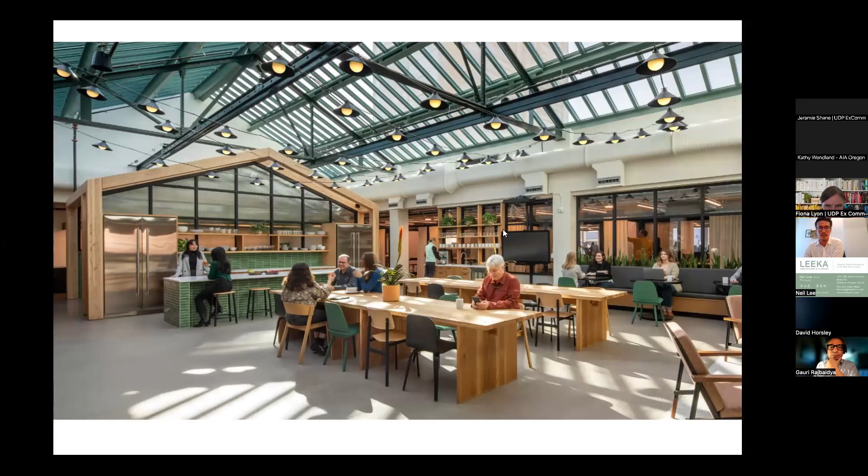Before I dive in, just a little bit about us, SERA Architects. This is a view of our beautiful atrium right here in the Galleria in downtown. We're about 100 design professionals, an interdisciplinary firm of architects, interior designers, urban planners, and designers, and we have sustainability resources in-house as well. We do have a Bay Area presence in Oakland. We're 100% employee owned.

So here is a view of the center of the Jade District. If you're not familiar with Portland, the Jade District is out in Southeast Portland, and this is what I call the center, 82nd and Division, a very important corner here. The reason I bring this up is Canton Grill, what we're going to present today, really only exists in the fabric of the work that APANO has been doing over the last 10 years.

With APANO being a place-based community organization, it was really important for them when they set their roots here to understand the kind of community they were doing this work for.

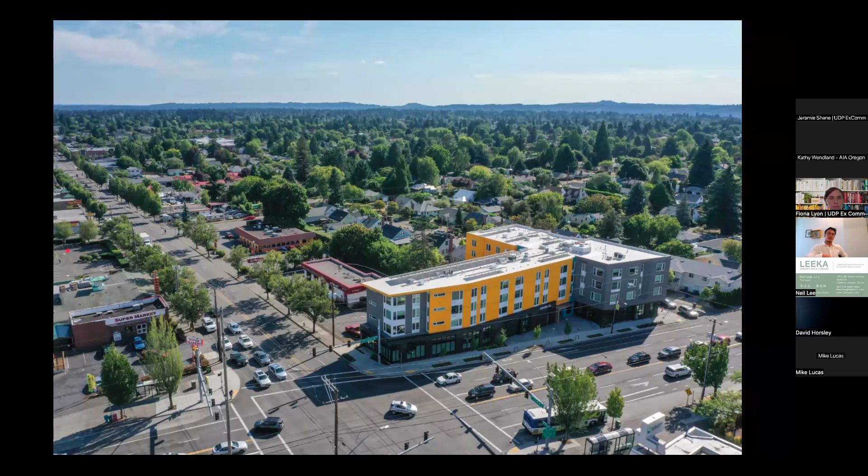In this district, APANO really felt like each parcel was precious, and faced with gentrification and their values in anti-displacement, they were left with two options. How do you deal with gentrification? Do you let it pass through, or do you try to keep the social capital here in this neighborhood? The Canton Grill is an example of APANO fighting to keep the social capital here and build into this district.

As we dove into this project, exploring the artifacts and materials left over, there's quite a bit of history and patina and the story that we wanted to capture. There's just this ambience and experience of the restaurant that I don't think would be easy to recreate.

So we're going to try to see if we can keep some of this for the future project. But I only got to go to this restaurant once, and the more I worked on this, the more I regretted not being able to go more.

Sorry, I skipped over this. The restaurant was established in 1944, and it stayed in the family all the way till 2022. It was a beloved icon and landmark for Southeast Portland.

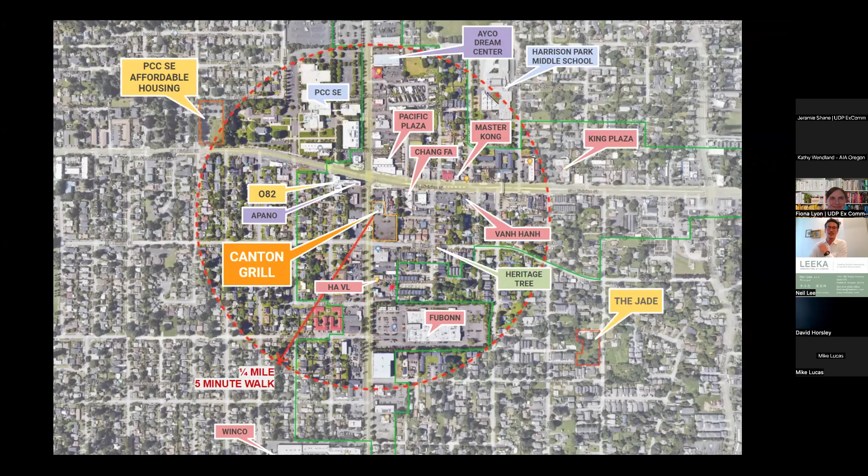Some early site analysis that we did for the project. The site is perched up on a little bit of a hill before it slopes down as you move south, so it's going to get great sun exposure.

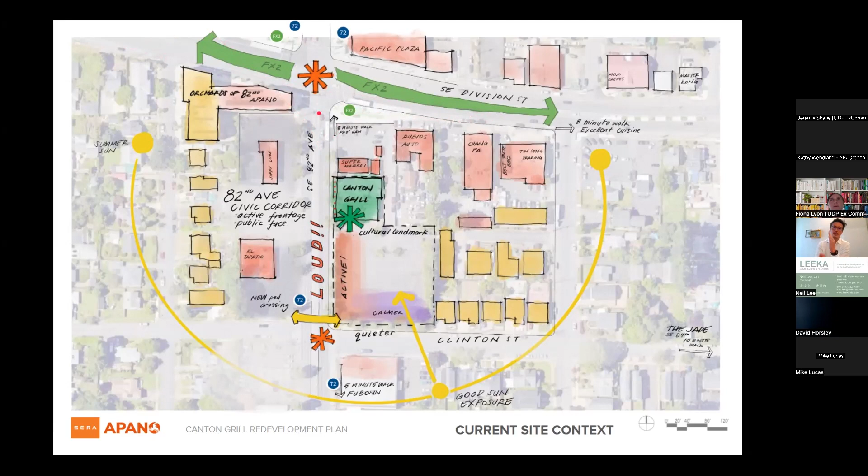As we talked about the project, the fact that 82nd is just so loud - we couldn't avoid that in any of our conversations. That always dominated. So 82nd is just such a loud place, and that was always going to be a challenge for us to design for, especially with APANO wanting this project to be a walkable, vibrant mixed-use project. That was something that always came up. And with Division, we have the FX2 line, and the 72 line going north-south is the busiest bus route in the city.

So not only did we look at the current site context, but we anticipated the future context. We all knew how big of an impact the Division improvements and the new FX2 line had on Division with the medians and all of those things. So we put this out there to not discount the fact that with the new 82nd improvements and the new FX line coming, that could really change the character of 82nd, which is a civic corridor.

And on either side of 82nd, our site included, is zoned CM2, so quite a bit of density could be introduced over the course of the future. Just to the east of our frontage, it transitions to residential pretty quickly.

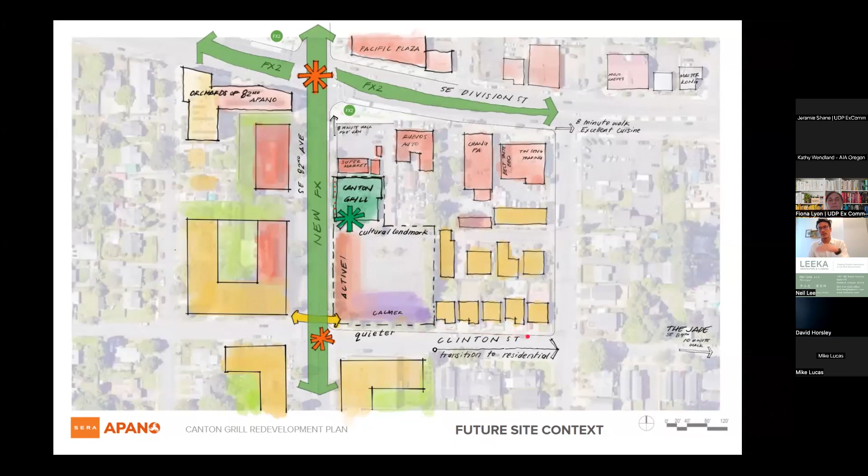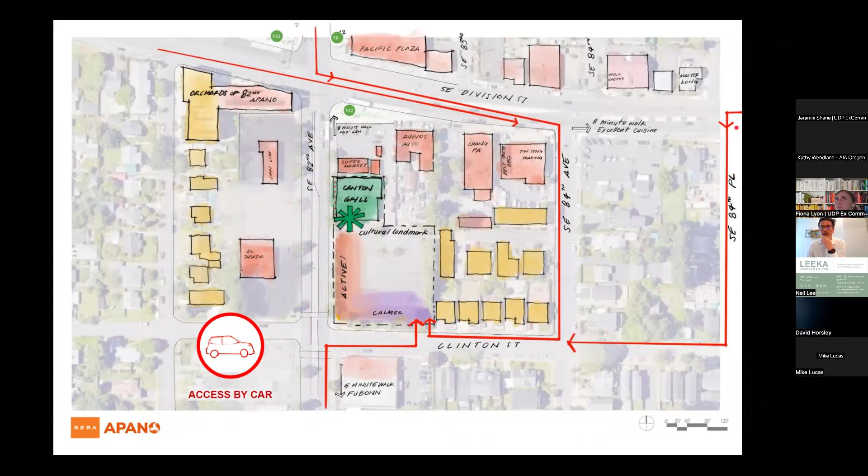I think ironically, it'll be a little bit easier to get to the site by bus and by walking. Biking is a little trickier with not all the streets being connected out in this part of town. Some of the roads are unimproved, so I'm looking forward to the new crossings and intersection improvements that'll help improve bike access.

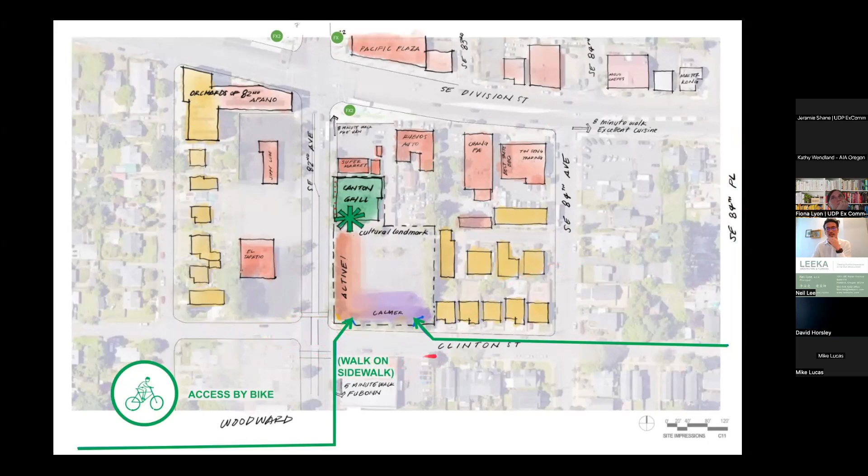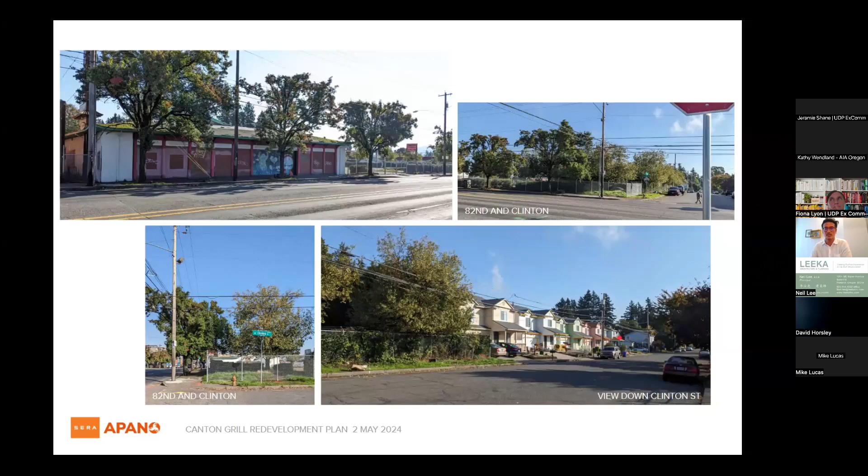Diving into our process, we started with a big goal-setting workshop. APANO very much values consensus building with their constituents and stakeholders, so we brought in what they call their friends and family of APANO - not only the project team, but members of their board, some staff members, and the Jade District steering committee.

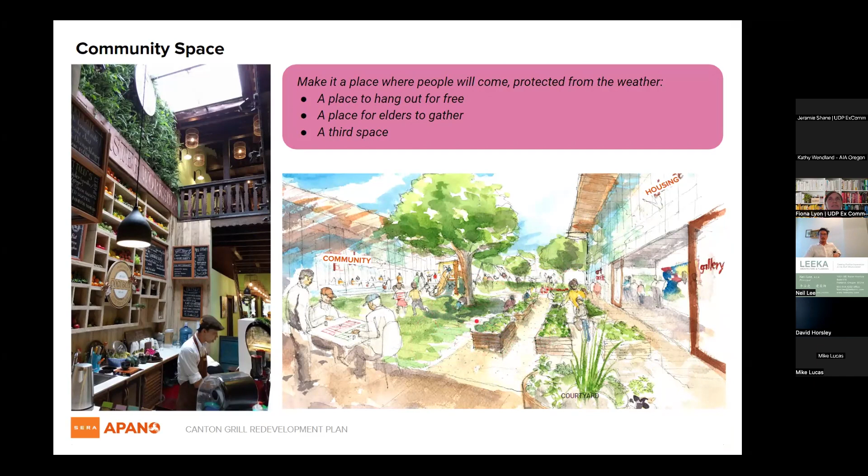Some ideas for the community space: make it a place where people could hang out for free, elders could gather, make it a third space, definitely protect it from the weather. This image in the bottom right actually came from the Jade District visioning plan from 10 years ago - so that project still has mileage out here.

Some other ideas for open space - is there a way to make the plazas have cultural markers so that it looks like not just anywhere in town, but specifically for the Jade District? Some interesting opportunities to bring landscape to the site.

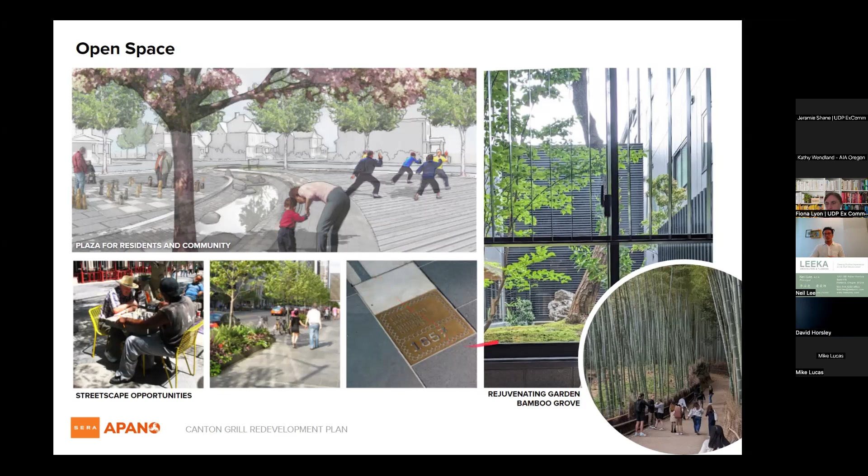And this isn't something you always think about with the Jade District, but we're going to have great opportunity to get views out to the mountains, the hills nearby, just the way that it's perched up above the surrounding area.

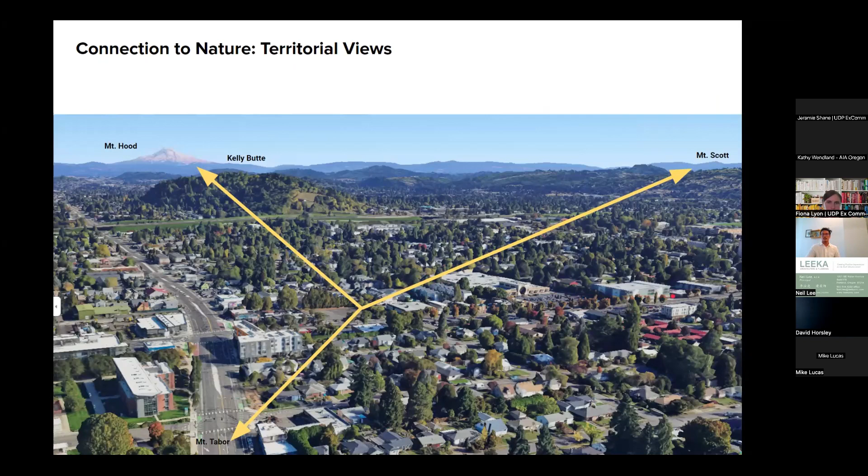As we looked into the commercial programs, there was quite a bit of excitement to bring food hawkers to the site. In Portland we're famous for food carts, but this would bring a different nuance and feel, the food hawker scene, like if you've ever been to Southeast Asia, Singapore specifically, or Malaysia. It's a very energetic and dynamic thing where someone vends maybe one specialty, but they just have this one area to do it. It's a really nice feel, and that would be really cool if we could bring it to the Jade District.

These ideas of micro kitchens and retail accelerators came from APANO, not just thinking for themselves, but how do they support the surrounding community. If somebody wants to start a business and needs a leg up, could this development have a place to help support them in that way?

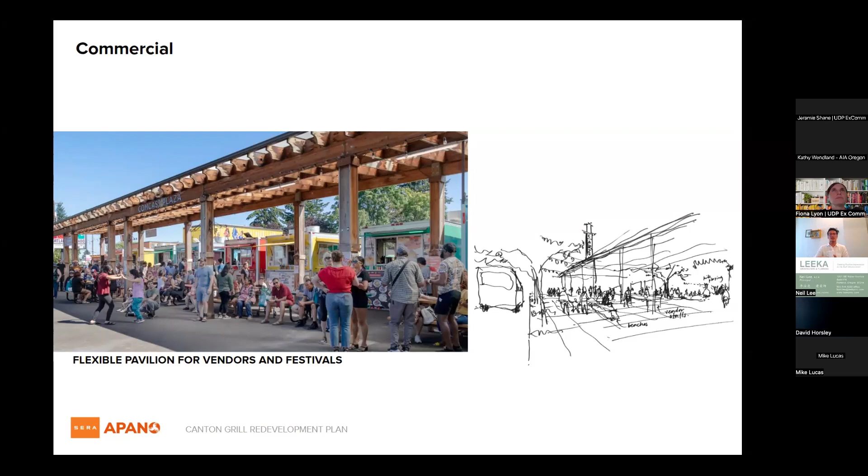So this is the Portland Mercado, which is pretty successful.

Once we got through that process, we finally put some schemes together that combined all the different programs. This one we called the centerpiece, trying to invite public and community space into an atrium or skylight-lit space. Hawkers and more entrepreneurial spaces could filter along the street edges of Clinton here, and then 82nd running up in this kind of purpley magenta color.

This recognizes the importance of the location of the Canton Grill restaurant and how it served as a landmark. In this case we're not keeping the restaurant, we're not redoing it, but adding in new columns and evoking the facade of it, bringing a place where people can learn about the history of the Canton Grill and things like that.

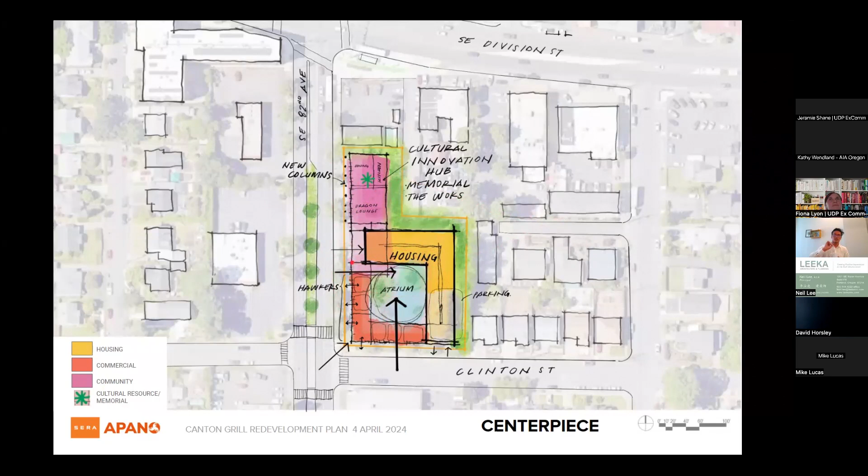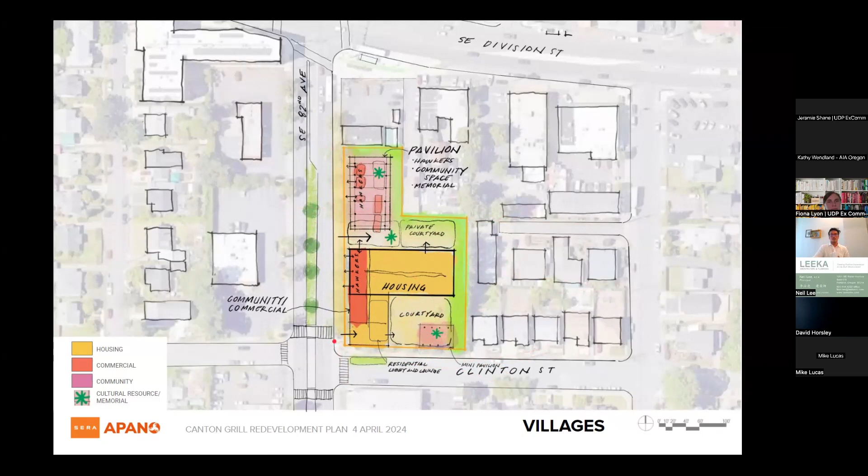In this scheme, this is where we introduced the open air pavilion that's flexible for the food hawkers and vendors, and maybe could have community space, creating a little bit of separation at the mid block. This is actually about 200 feet. The housing would be on the southern portion, with a courtyard with great morning sun access. So this was the two options we had midway through the project.

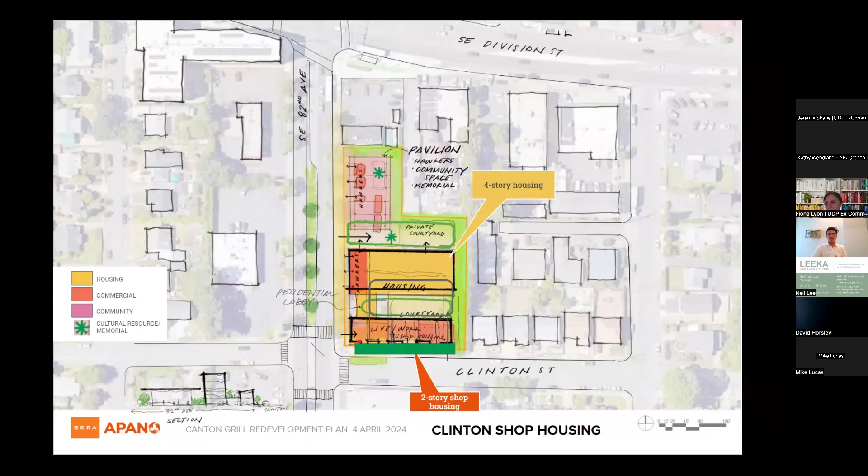We also saw an opportunity to tweak that last option. Maybe we could add a 2 or 3 story shop-housing instead of the courtyard, so it has a bit more of an edge on Clinton Street. This frontage could possibly be a bit more compatible with the single family residential adjacent to it, maybe creating that transition from commercial to residential.

I'm going to compress our design process down into this one slide. We took those three schemes and engaged back with the friends and family of APANO, got some really good feedback. There was a lot of excitement for the public open space, and some good feedback about maybe programming too much onto the site. From that, we took those three schemes and consolidated them down to two options: one is an L-shaped building with a pavilion, and the other we mixed and mashed together, kind of like a combination meal from the old menu.

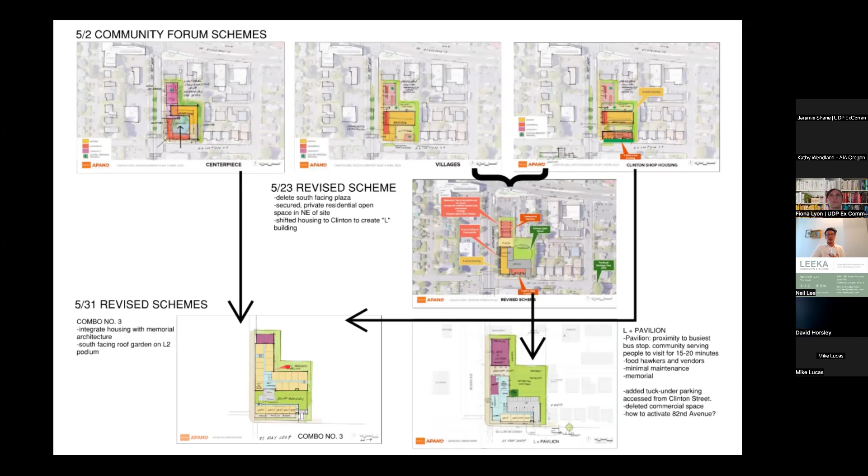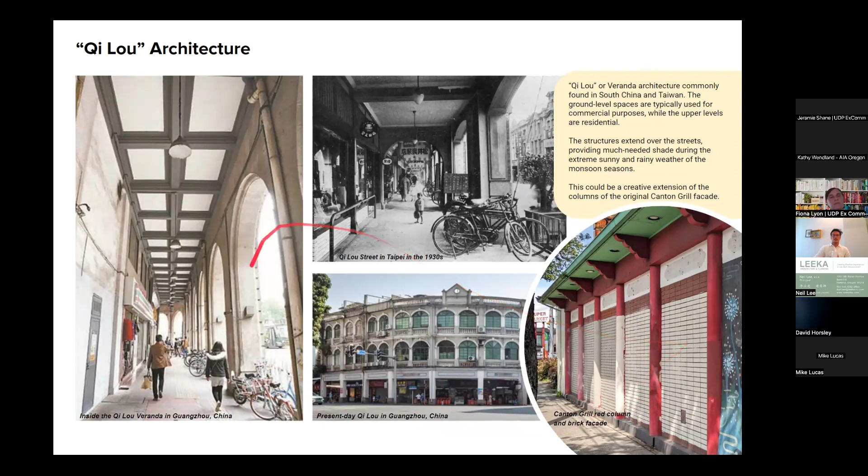We had a little more time to dive back into the vernacular architecture from Guangzhou. Here's an example of some Qi Lou architecture, veranda architecture in Guangzhou and Hong Kong. You also see some of this in Taiwan. This type of colonnade, with the walkway protected by the building, is protective against monsoons and the hot sun in that tropical climate. So we felt there might be a formal connection with the facade architecture of the Canton Grill, which we could study further as we get into the architectural design. Out here in the Northwest, with how rainy it is, this might actually be a welcome thing.

Oh, some people can't see. We're doing okay? Travis, I think you're good. Yep, Neil, maybe try closing out and rejoining. But I think the rest of us are good. Thank you for bearing with me all the way till here.

We're getting to the two schemes that we currently have. This one we called the L plus pavilion, but eventually just called it combo number one. In this scheme, we have an L-shaped affordable housing footprint on the corner of 82nd and Clinton. Some important elements: we really want a wide sidewalk on 82nd for opportunities for nice street trees.

Maybe there could be another place for benches and more landscaping, just to soften up that frontage and create a bit more buffer. We sketched in the new crossings that are going to come in. I think there's going to be a signal to stop traffic on 82nd, which will be pretty exciting and completely change the dynamic of this intersection.

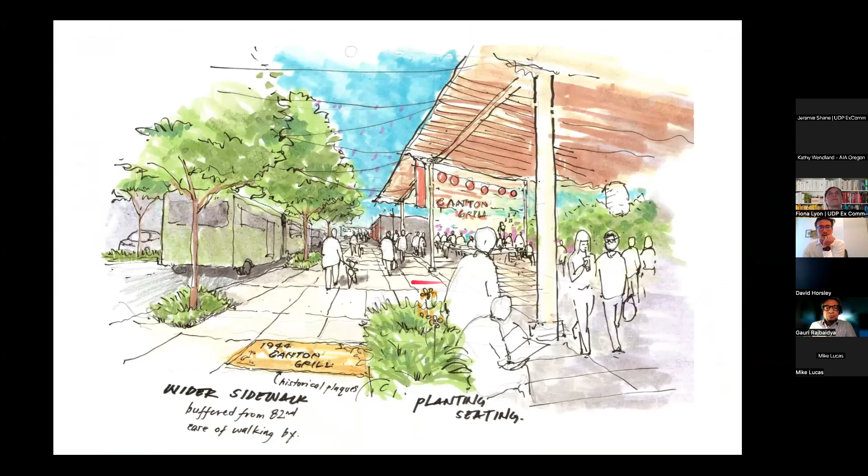Here's a little vignette of what a widened and improved 82nd frontage could be, with a new FX bus. Some of the historical interpretive aspects, maybe we could make those into bronze plaques and get those into the hardscape — we're open to all kinds of things. If you can't tell, we're still pretty early in the design phase, so a lot of stuff is still on the table.

Here in Old Town Chinatown, there are some really great bronze plaques designed by Swen Ho that are out in the sidewalk, and I think those do a really good job.

Here's an image of what the Tai Chi Plaza could be, with some tables for the elders to play chess and Chinese chess. I think community gardens have been really successful in this neighborhood. Talking with residents of Orchards 82nd, they definitely want a big children's playground and a safe place for their kids to kick a soccer ball, not bouncing balls off of cars and things like that.

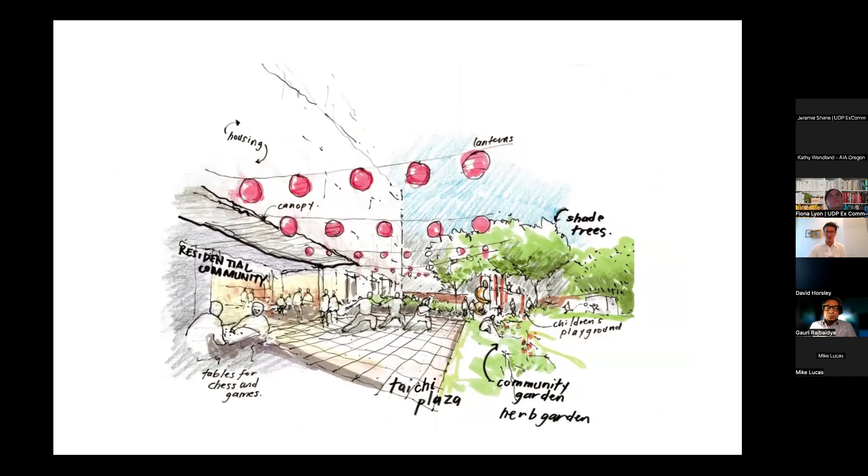The last scheme I'll share we call combo number 3, and it's a much more intensive development. Instead of a pavilion, we show this as a shell space that could be affordable commercial space. Maybe a portion of it is the memorial, so you almost visit it like a museum. There's a mid-block plaza you would enter through a big formal gate that ties all those uses together. Here, instead of the Hawker Alley, the hawkers are tucked under the building, activating 82nd.

What's interesting with this scheme is the L is pushed to the north, and we can create a little roof garden above the parking. This will be illustrated in this view. The higher density housing is pushed back a little bit, and then maybe you could do something lower scale that's more compatible with the residential adjacent to it.

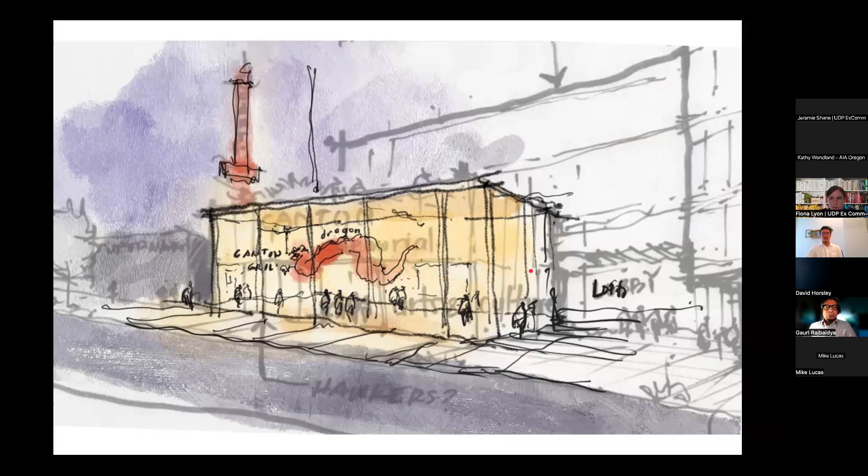Here's an idea where the pavilion, the affordable commercial space, or even the memorial could act like a lantern and be activated at night with different art exhibits and maybe even projecting art. So this was a dragon, which I thought was cool. And I think that's all.

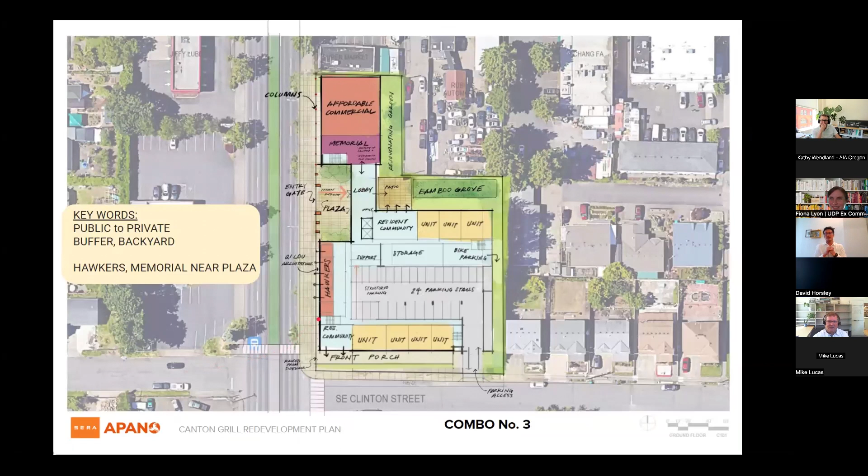There's a bit of an inside joke because this scheme was like a mishmash of a bunch of different things. I introduced it to the team as combo number 3 to get a couple chuckles, and then we decided to call the L Pavilion combo number 1, with the subtitle Simple Tasty Dish. This one is nice and simple, the most straightforward one.

Combo number 3 got its name because when Swen Ho was doing the historic research, she interviewed Fred Lewis and his daughter Cindy, and they talked about what made Canton Grill such a beloved place — it was just the consistency. Somebody could go to that restaurant for years and say, don't you ever change combo number 3, that's my favorite dish, that's the only thing I'm gonna order, but don't you ever change that. So that's where that came from.

Very creative, I love that.

We have a question from Saumya: you've talked a lot about the master plan program, but could you hone in on the development itself and talk about the targets for parking, types of units, quantity of units, just the development program in general? Yeah, that's a really good question. I think it's still fluctuating.

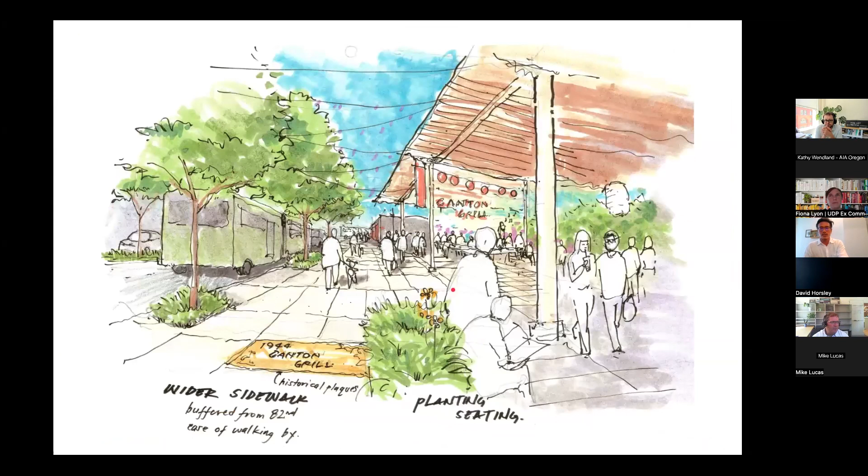So for parking, they could go with anything from 0 to hopefully not more than a 0.25 parking ratio. In terms of unit count, that's also fluctuated. This site could yield 200 units, but there's no financing that would support 200 units right now, so in this L scheme it could be anywhere from 40 to 60 units. That's tuck under parking, like 12 to 18 stalls, or even 20 stalls, which is in that 0.25 to 0.3 ratio range.

That's been the challenge — people do need parking in this part of town, ironically, even with the busy transit for getting to their jobs. But as you can see, the site isn't that big. If we provide more parking, we lose some of the great open space amenities on the site.

Thank you, Travis. While we're on this thread, you talked a little bit about zoning and the market — we hit the market before the zoning — but are there any other zoning challenges you've come across while researching this site that have been specifically challenging to design?

Let me think about that a little bit. So we're CM2 with a Main Street overlay, no design overlay. The CM2 is pretty straightforward. Since we're not trying to max out the site, we're keeping it at 45 feet tall and within the FAR, and since we're planning affordable housing, I think we have access to the FAR bonuses. All of that has been not challenging so far.

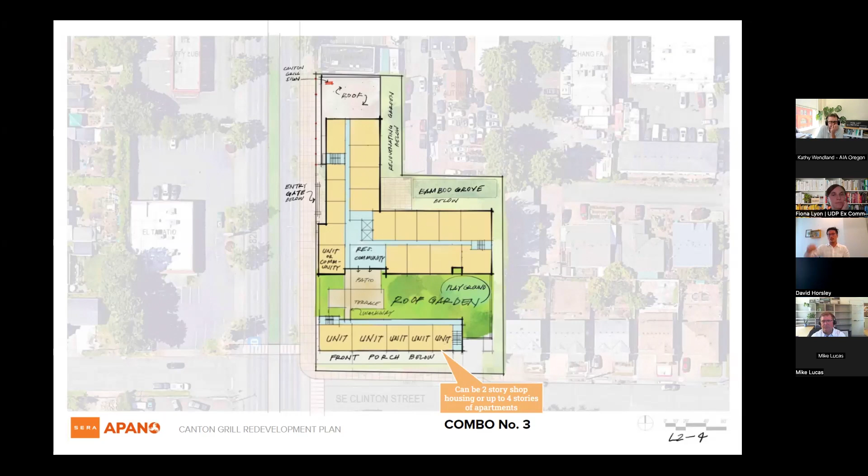BPS did reach out to us because in the comp plan this site has the potential to go up to CM3, so we're studying what it would mean to upzone to CM3. It's one of those funny things — because we're not doing such an intensive development, we don't need more FAR, but maybe we could go up to 65 feet tall, and that would change some things up. Can you imagine varying the heights of the buildings and things like that? That would be pretty exciting.

Awesome, let's see, we're waiting on a couple more questions — I'm gonna throw one in while we're on this graphic. I want to say I love the vernacular you've picked up on here. It's really cool to see a building that's embracing the identity and context of the neighborhood.

Thank you. I'm curious, thinking about the program of a hawker style market, are there good local examples — like would that be something APANO would run, or more of a food cart vendor type thing? How do those work, as a shared resource that somebody holistically manages, where you rent or lease a stall?

Those are good questions. I think either APANO would have to run it, being a landlord with their own agenda, and if they leased it out it would be very affordable. I've even heard them talk about not wanting to create tax burden, so I don't know if they might just give the space away for free. Maybe somebody on the call would know — I don't know of any food hawker examples in town.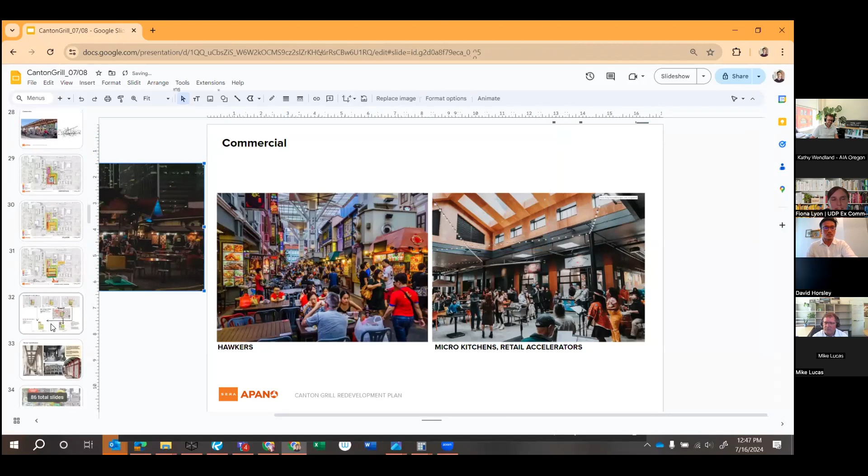Still waiting on more questions, but I'll throw in another one. I'm curious about specific engagement with restaurant owner businesses in the area, making sure they don't feel like this is competition but creates a broader aggregate of destinations. Are there subgroups of engagement toward other restaurants?

I think that's a good coordinate idea for everybody. So far we haven't done that specifically, but Swen Ho was hired as the historic research fellow through APANO for their monument grant.

She interviewed Fred and Cindy with Canton Grill, and she interviewed Annie Wong with Wong's King. So there's already been a number of interviews, and I think there could be even more.

Where I'm going with this is the monuments grant is so fascinating because we're talking about this project since Canton Grill closed in 2022, and the pandemic was very challenging for restaurants out here. Ocean City closed, Wong's King closed.

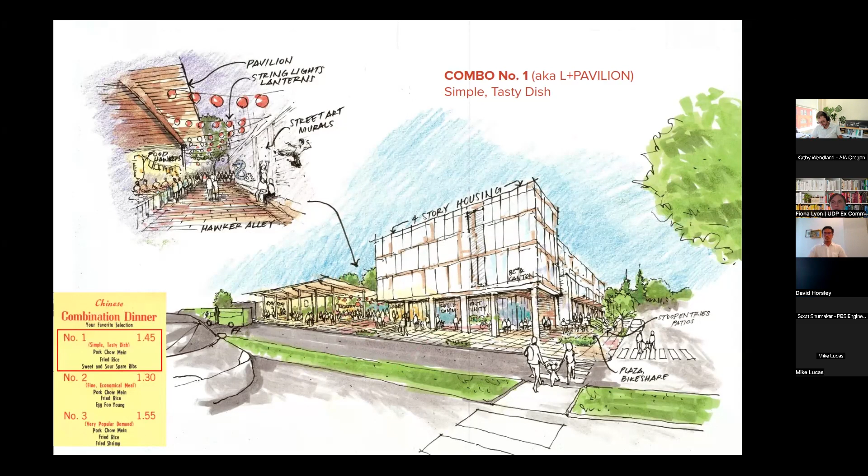Gail just wanted to note, really excited. Gail was part of the MERP project team that helped APANO find potential community garden sites across this corner of the city. I was really excited to see a lot of green community garden spaces being included. Oh yeah, then I stole your idea, Gail. Kudos.